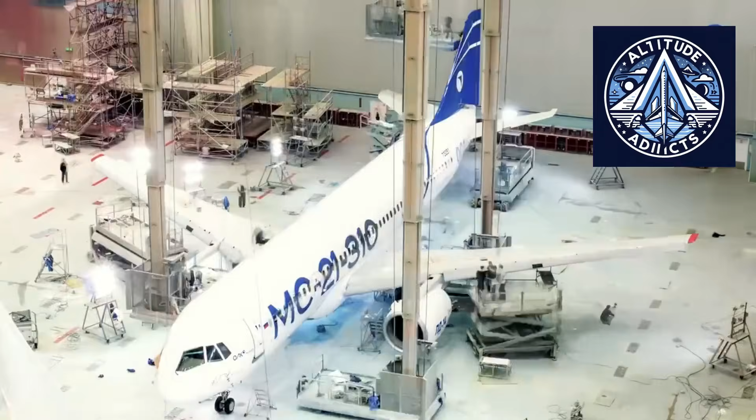The Irkutsk Aviation Plant made a significant contribution to the aviation industry of Russia in March 2026 by introducing a digital model of the MC-21-310 aircraft. This development is not just a technological upgrade, it is indicative of a broader transformation of the entire sector, which is rapidly transitioning to wholly digital production management. As Altitude Addicts explores, this shift signals a deeper change in how modern aircraft are conceived, built, and managed.

Russia's independence in the medium-haul aviation segment was strengthened by the development of the MC-21, a next-generation narrow-body aircraft that was intended to replace foreign competitors. Nevertheless, the initiative has become even more significant in the face of external pressures and sanctions. It has effectively become a symbol of technological sovereignty.

In this context, the implementation of a digital model is not simply a production improvement, it is a strategic instrument that expedites development, enhances manufacturing precision, and mitigates operational risks.

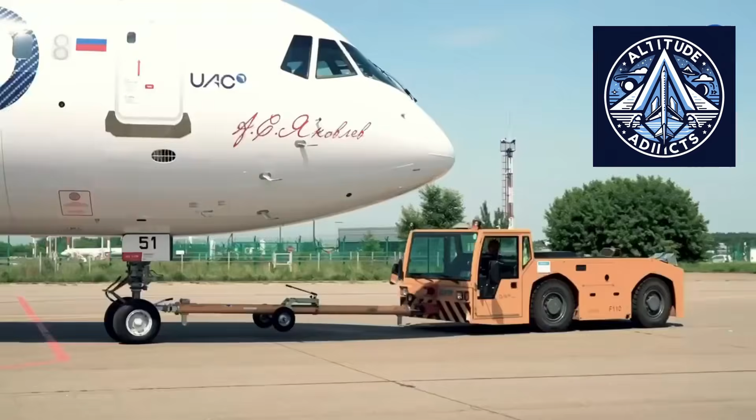This transformation becomes clearer when we look at how the entire aircraft lifecycle is now being unified into a single digital environment. One of the most noteworthy achievements is the establishment of a system that covers all phases of the aircraft's life cycle. Design documentation, manufacturing processes, material data, and pilot training modules are all integrated into a single framework within this system.

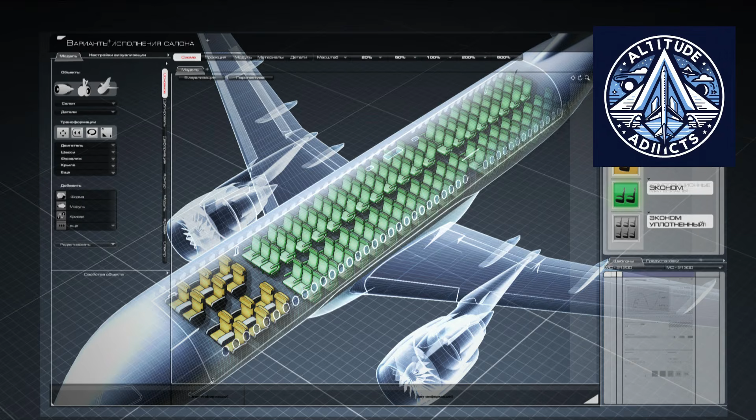This method eliminates conventional inconsistencies between design, production, and operation. In the past, even minor design modifications necessitated extensive coordination among departments. Currently, the complete system is immediately updated. Therefore, the probability of errors decreases, and production cycles are substantially shortened.

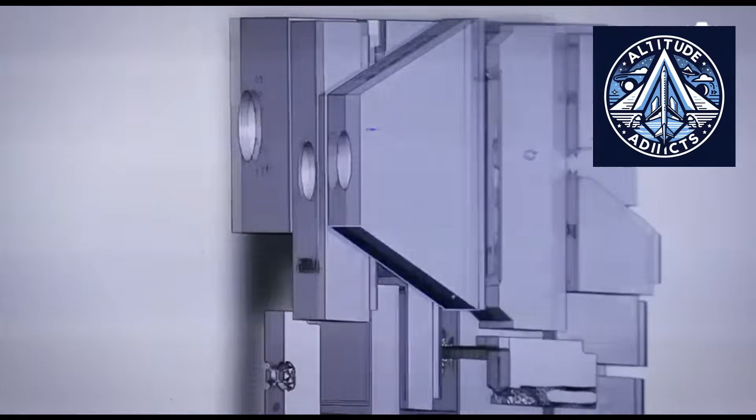Simultaneously, manufacturers acquire the capacity to oversee product quality at each stage, a process that is frequently referred to as end-to-end quality control. In essence, this signifies a transition from fragmented production processes to a unified digital ecosystem in which data serves as the primary resource.

At this point, an important question emerges. Is this truly a digital twin or something less advanced? Industry specialists provide a more careful interpretation of the term digital twin, despite its frequent use. There are those who contend that the existing system is more accurately described as a digital prototype. The difference lies in the degree of integration with the physical object.

In order to be considered a genuine digital twin, the physical aircraft must be in constant real-time synchronization with its digital counterpart throughout its entire life cycle, which includes operational service. The MC-21 is a highly advanced model that is still primarily focused on the design and production phases rather than full life cycle integration.

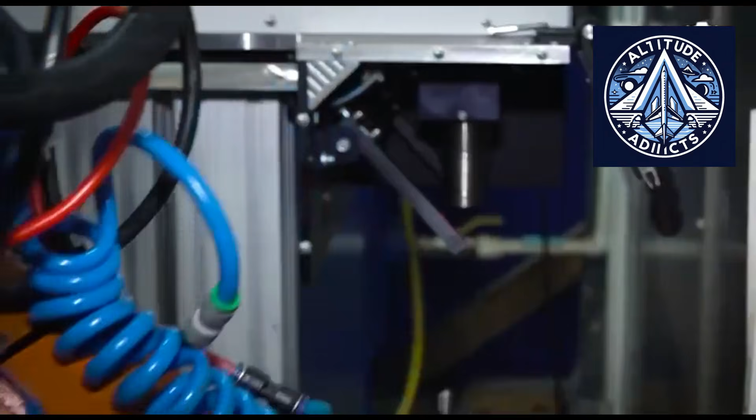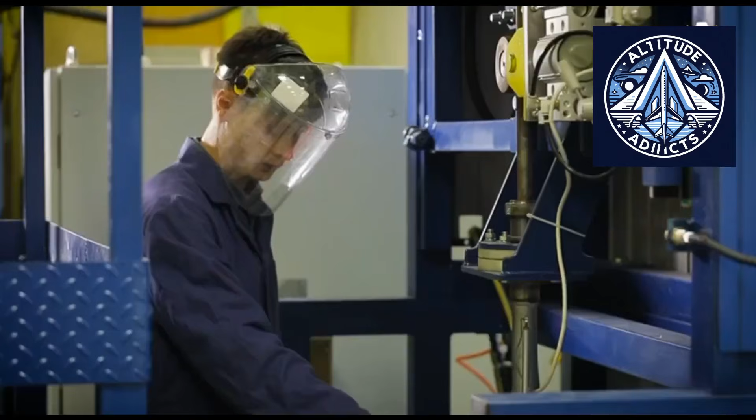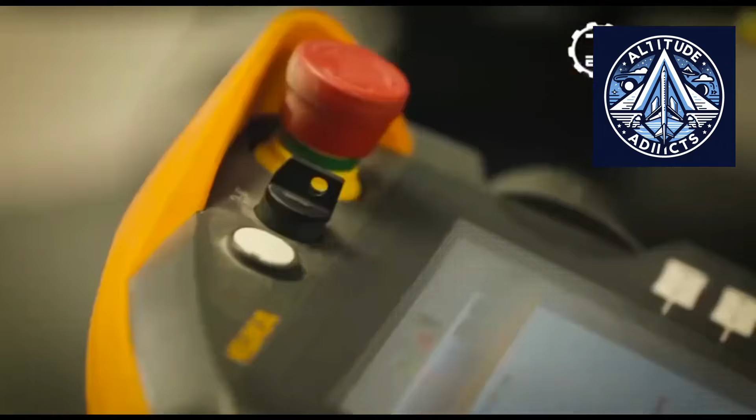To fully understand the significance of this, it helps to look at how long Western aerospace manufacturers have been working on similar technologies. Companies like Boeing and Airbus began integrating digital engineering concepts into aircraft development as early as the late 2000s. Programs such as the Boeing 787 Dreamliner relied heavily on digital design environments, simulation, and integrated lifecycle data. In the same way, the Airbus A350 incorporated advanced digital modeling and predictive maintenance systems.

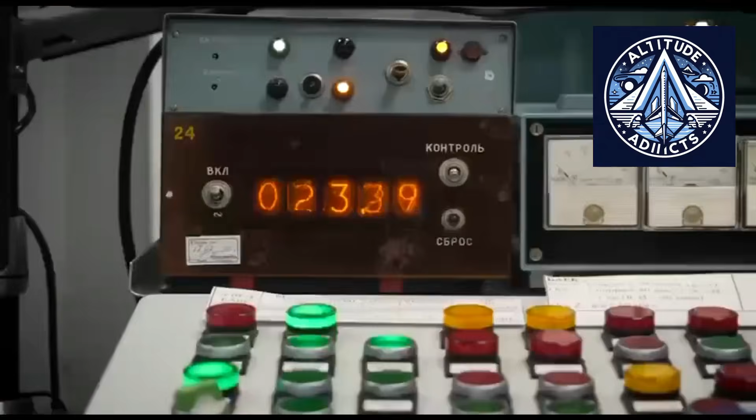By the mid-2010s, these manufacturers had moved closer to what could be described as early digital twin ecosystems. In these systems, real-time operational data feeds back into design, maintenance, and performance optimization. This effectively gave Western aerospace companies nearly a decade-long head start in refining data-driven production and lifecycle management.

As Altitude Addicts notes, even with that head start, the journey toward fully synchronized digital twins is still ongoing. Nevertheless, it is equally important to recognize that even in the West, a fully realized digital twin remains a work in progress. In that sense, Russia is not entering a finished race, but rather joining an evolving technological landscape.

Another critical dimension of this transformation lies in the shift toward domestic technology. The transition to domestic software solutions has been a significant factor in the digital transformation. The Irkutsk Aviation Plant is currently replacing foreign systems with IT platforms developed within Russia.

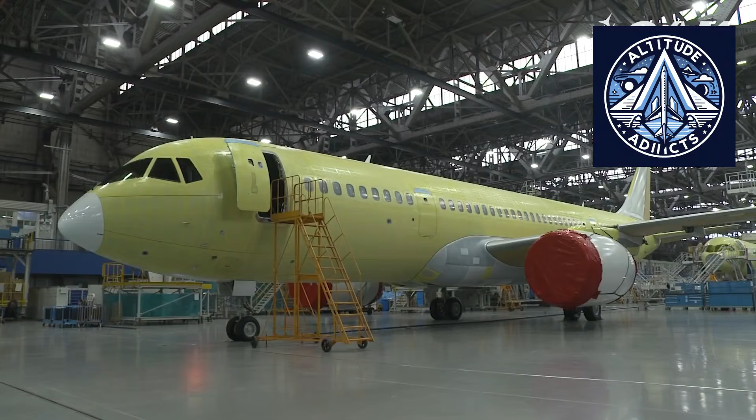At the core of this transformation is an integrated digital infrastructure developed within the national aviation ecosystem. It facilitates the comprehensive administration of aircraft development throughout all stages, from the initial design phase to maintenance. Industry competence centers, which unite software developers and major industrial corporations, play a critical role in this process. This collaborative approach ensures that solutions address the needs of the entire industry rather than a single organization. The outcome is not simply a collection of tools, but a cohesive digital infrastructure capable of sustaining complex industrial processes.

At the same time, artificial intelligence is becoming a central force in optimizing production. Neural networks are being used to analyze workflows and identify optimal solutions. One of the most critical areas is the movement of components between workshops, where even small delays can create major inefficiencies. AI systems determine the most efficient routes by considering machine workload, distances, and task priorities. This reduces production time and improves overall efficiency.

As a result, manufacturing is gradually shifting from conventional management approaches to intelligent systems driven by real-time data analysis. This is where Altitude Addicts highlights a key shift. Factories are no longer just physical spaces. They are becoming data-driven ecosystems.

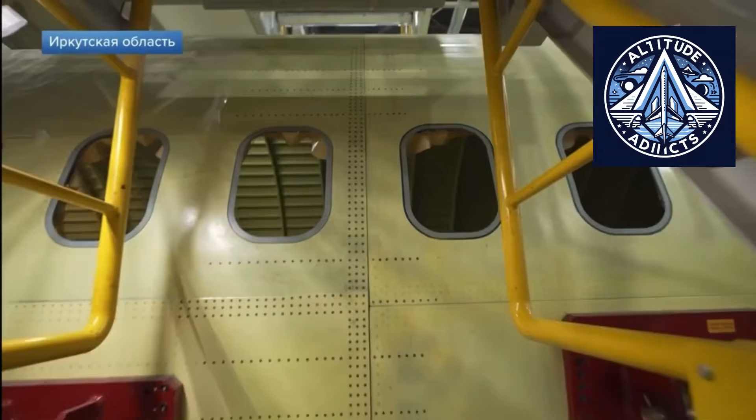Alongside AI, equipment monitoring has emerged as another crucial pillar of digitalization. The facility now gathers real-time telemetry from machinery across the production line. This data is used to evaluate equipment condition and predict potential failures before they occur. As a result, the plant is transitioning from scheduled maintenance to predictive maintenance. Repairs are carried out based on actual equipment condition rather than fixed schedules. This approach minimizes downtime, prevents unexpected failures, and enhances overall efficiency.

Additionally, workloads can be dynamically redistributed across machines, improving production stability. Despite these advancements, the MC-21 program continues to face real-world challenges. The timeline for mass production has been repeatedly postponed due to technical complexities and the need to replace foreign components. However, aircraft assembly is actively underway, and production capacity is gradually increasing.

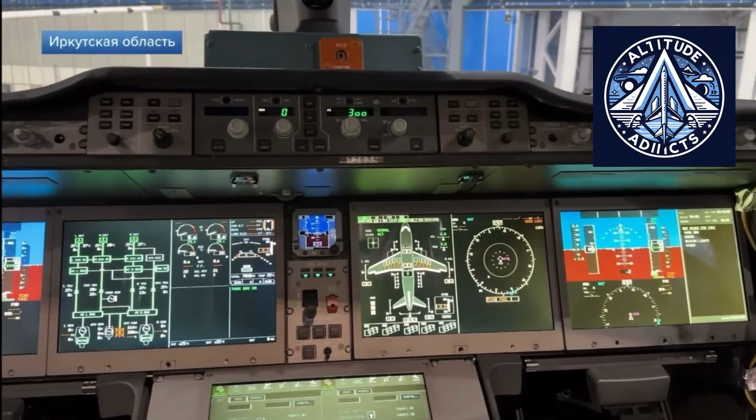Digitalization plays a crucial role in overcoming these obstacles. By improving coordination and efficiency, it helps offset some of the limitations imposed by external constraints. Still, challenges remain, including integrating new IT systems with existing infrastructure and training personnel for digital workflows.

Government support has also played a significant role in accelerating this transformation. Officials have emphasized the importance of developing domestic IT systems for critical industries such as aviation. These initiatives are not only responses to current challenges, but also foundations for long-term industrial growth.

In this broader context, the MC-21 becomes more than just an aircraft. It serves as a platform for deploying next-generation industrial technologies and shaping the future of aviation manufacturing.

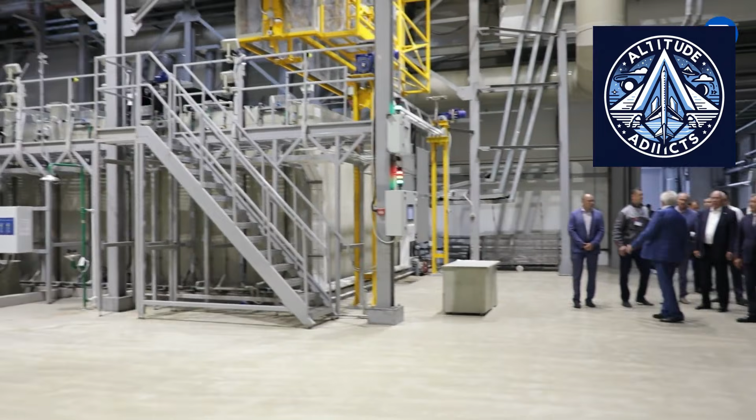Ultimately, the deployment of the MC-21-310 digital model reflects a deeper shift within Russia's aviation industry. Data, integration, and intelligent systems are now at the core of production. Manufacturing is becoming more flexible, precise, and resilient to external pressures. Despite ongoing challenges, the direction is clear.

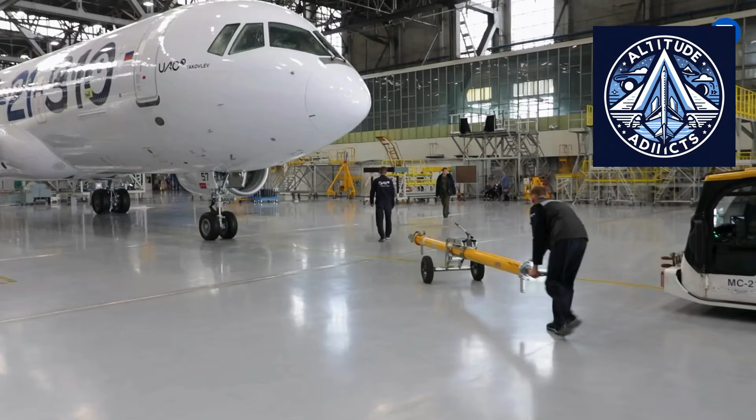Digitalization is no longer optional. It is essential for competitiveness. The MC-21 is not just a new aircraft. It represents a broader transformation in how modern industry operates, and it may ultimately shape the future of aviation in the decades ahead.